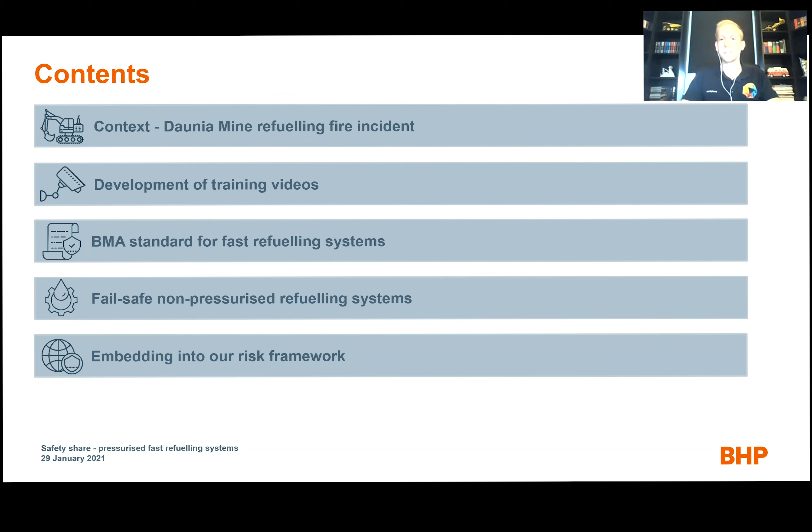As an event overview, before we look into some much better representations of it, on the 4th of April 2020 there were standard refueling operations on an excavator, a Cat 336, but the fuel cap on the top of the tank had blown open under pressure, which covered the excavator operator in diesel fuel, also impacted the exhaust system, and that resulted in the ignition of a fire. This was controlled using fire suppression and a couple of fire extinguishers at the time, but it's not a very pretty sight to have when that incident happens. You can see a little photo there of the immediate aftermath.

Through the investigation, after a few sessions to tease out the learnings, we came to these conclusions: that certain early shut-off and overfill events are quite common, not only to BMA, BHP, but from what we believe to be the wider industry as well. There's just a lack of engineering standards, which led to variations in systems and OEM components, and that can happen naturally over time when fitting what is seen to be like-for-like components.

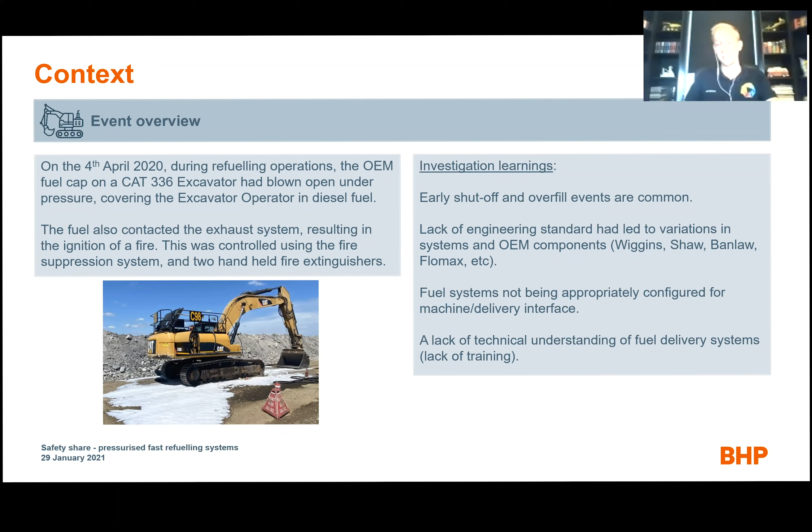Fuel systems may not be appropriately configured for the machine or delivery interface. You may have different delivery systems versus the receiving equipment, and that was something that had to be standardized as well. Generally, there was a lack of technical understanding of fuel delivery systems by way of training, particularly for service persons or operators. So can we go into the next slide?

It was pretty clear when we were performing this investigation that, even though we had subject matter experts in the room who dealt with hydraulics, it was very difficult to adequately convey that information through pictures, slides, or technical documentation. We found it hard to really show what the dynamic interactions of the refueling system were.

So what we'd done is contract an animation company, which we'd found out, I believe, the New South Wales Resources Council had used as well in recent videos, and it's an excellent way to convey information. So we'd done the same for our situation.

We've done a part 1, which is the initial incident and lessons learned, and a part 2 overview, which is more involved with training individual users of the systems with technical specifics. Those videos have been provided to Resources Safety and Health Queensland for distribution, but what we're going to do is switch over to part 1 to show the video, which will convey the incident in much greater detail than what I've done so far.

So let's roll it. Okay, and let's hope it works, mate.

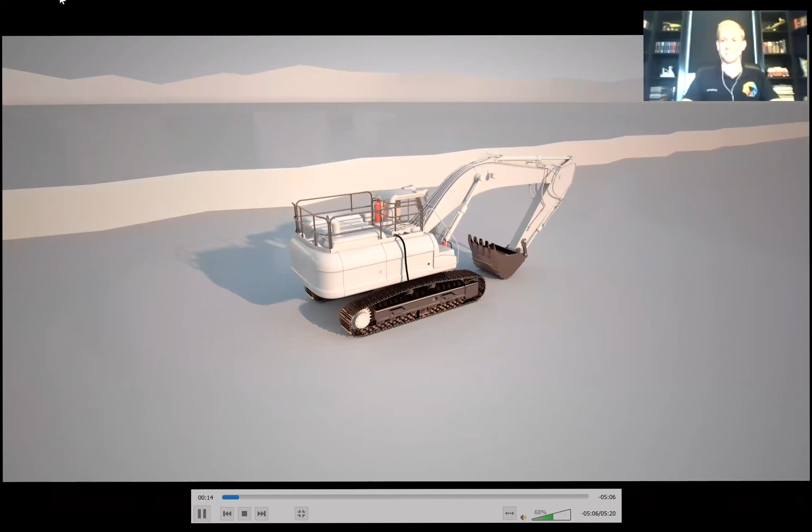Over the past decade, there have been a number of incidents at mining operations involving refueling activities on large mobile equipment, including several reported across Queensland in recent years. Incorrect refueling practices can result in environmental damage from fuel spills or fire events when fuel contacts hot surfaces. An incident occurred in a Queensland open-pit mine on the 4th of April 2020 involving an excavator and a service truck delivering fuel. The incident occurred as follows.

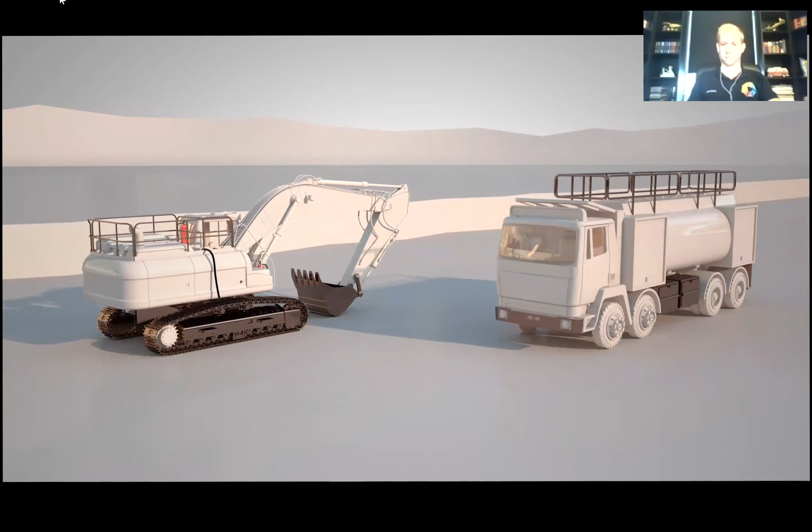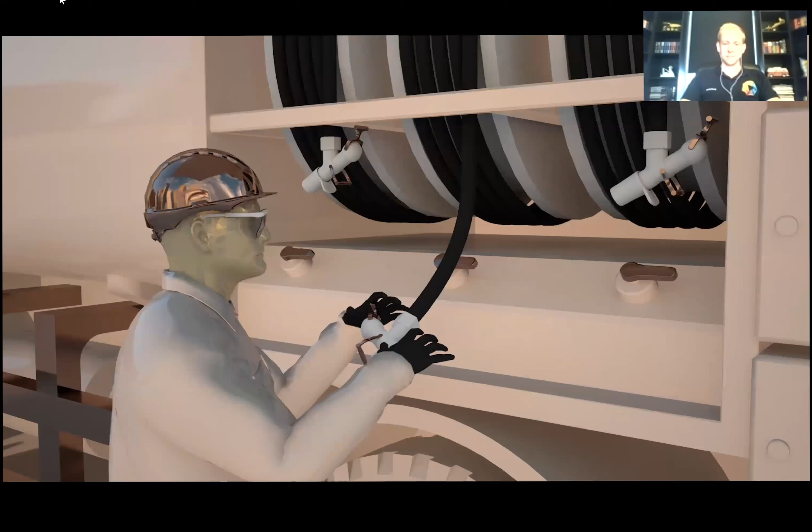An operator had requested refueling for their excavator at approximately 9 a.m. A service truck arrived near the excavator and parked a safe distance away. The operator, sighting the parked service truck, shut down and exited the excavator. Both the operator and service person attached their isolation locks to the excavator. The service person retrieved the fuel nozzle from the service truck and connected it to the excavator tank receiver.

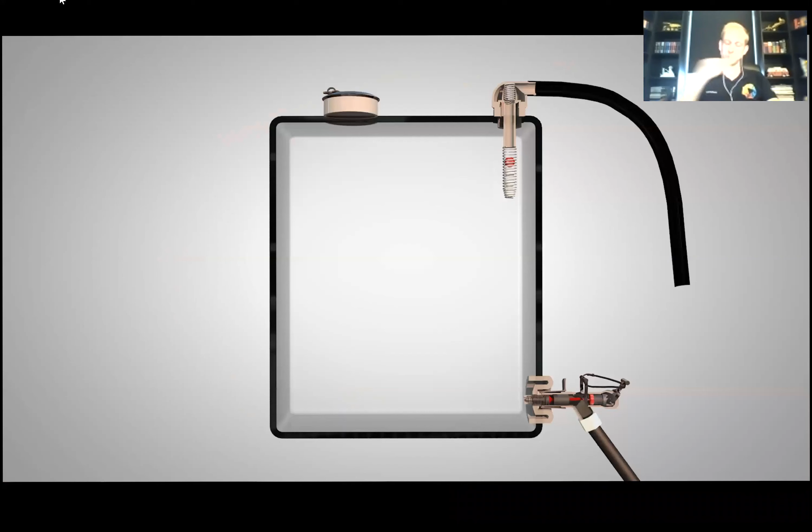The service person then went back to the service truck and started the fuel pump, then rotated the fuel nozzle handle into the on position. Through the incident investigation, it was uncovered that it's common practice for personnel to manually retain the nozzle in the on position, either by hand or by using implements to lock the handle in place. The service person was then positioned away from the fuel nozzle while the tank filled with diesel.

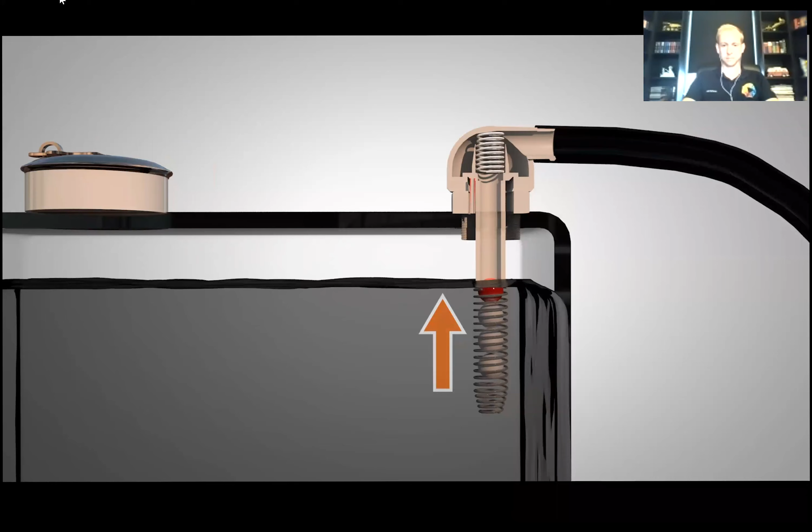As the fuel level rose, it reached the float valve, which obstructed the air venting from the tank. With the tank vent closed, the pressure within the tank rose sharply. Normally, in pressurized refueling systems, pressure buildup would automatically shut off the fuel nozzle by pushing the rotating T-handle back into the off position. Not, however, while the manual override held the handle in place.

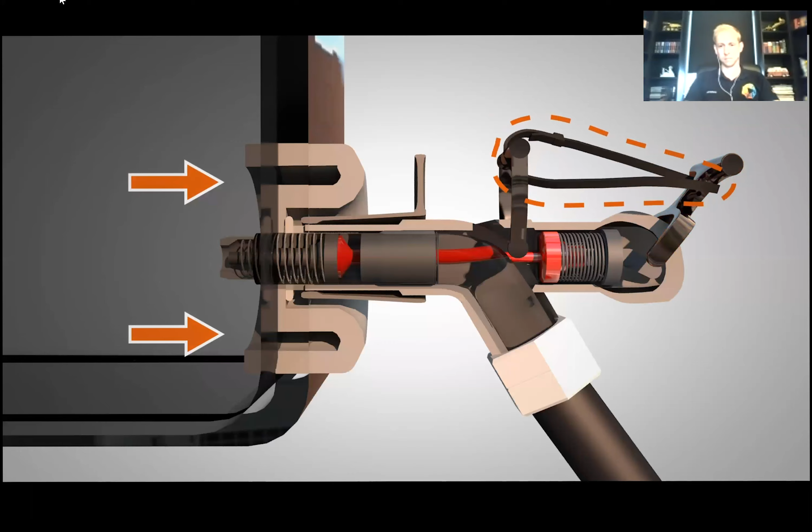The fuel continued to pump into the tank, further building pressure. The only means for air to escape was the 1.6mm bleed hole and the pressure relief valve in the tank vent. Note that this pressure relief valve cracks at approximately 16 psi and should not come into play during normal refueling operations.

With the air displaced from the tank, the fuel attempted to escape from the same tank vent. However, the fuel cannot be displaced at the same rate, as it is only designed for air, not fuel. The pressure within the tank increased further.

The retaining tang underneath the fuel cap deformed due to the pressure, which subsequently caused a bulge in the fuel cap. The O-ring in the fuel cap then burst, causing fuel to spill out on top of the tank, in addition to fuel spilling out of the overflow hose.

As the fuel spilled out of the fuel cap at the top of the tank and the overflow hose, the operator and engine bay were covered with diesel. Due to the heat within the engine bay, the diesel ignited.

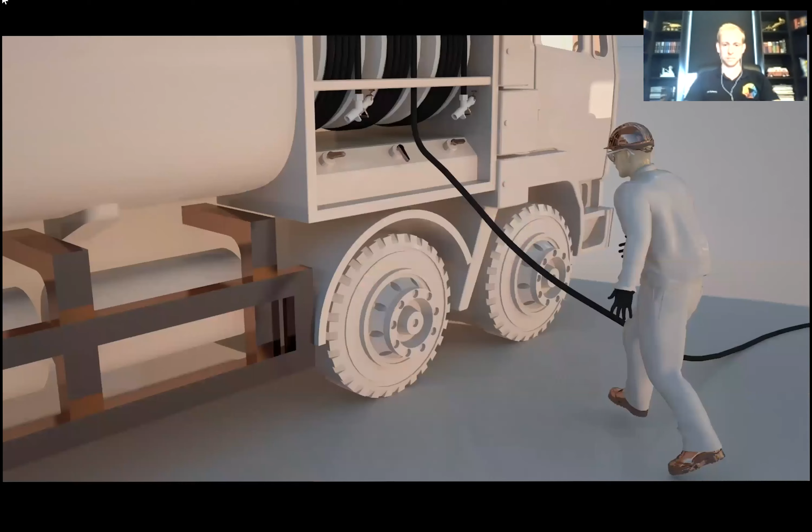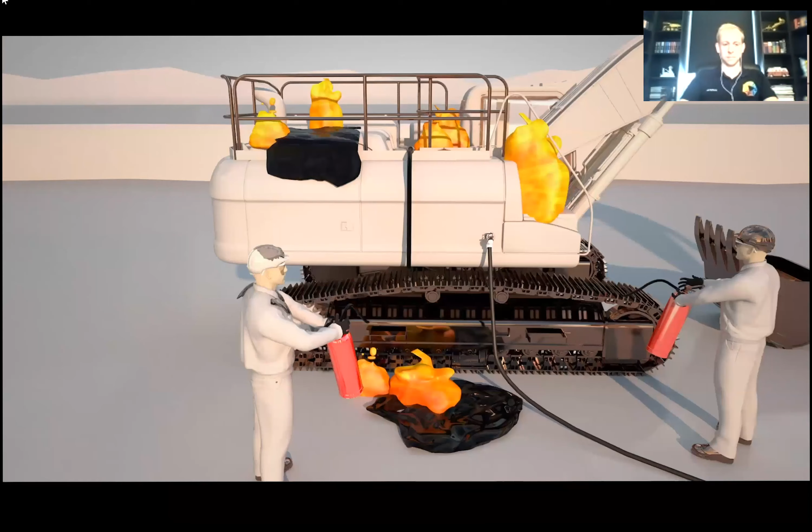The service person noticed both the fire and fuel spillage and ran back to shut it off. The operator then ran to the excavator cabin to activate the fire suppression system. Then both the excavator operator and service person retrieved fire extinguishers to put out the small fires on and surrounding the excavator. The emergency protocol was activated and personnel were notified of the incident.

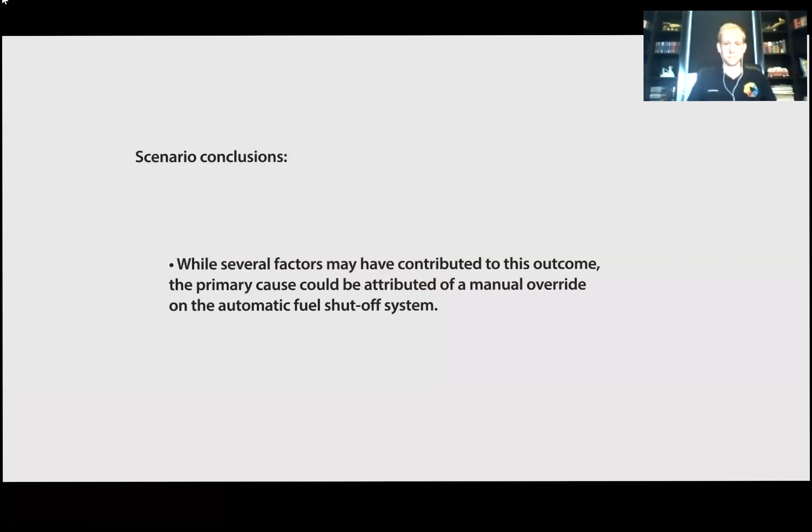While several factors may have contributed to this outcome, the primary cause could be attributed to the presence of a manual override on the automatic fuel shutoff system. This is believed to stem from a lack of technical knowledge of the safety controls present in pressurized refueling systems.

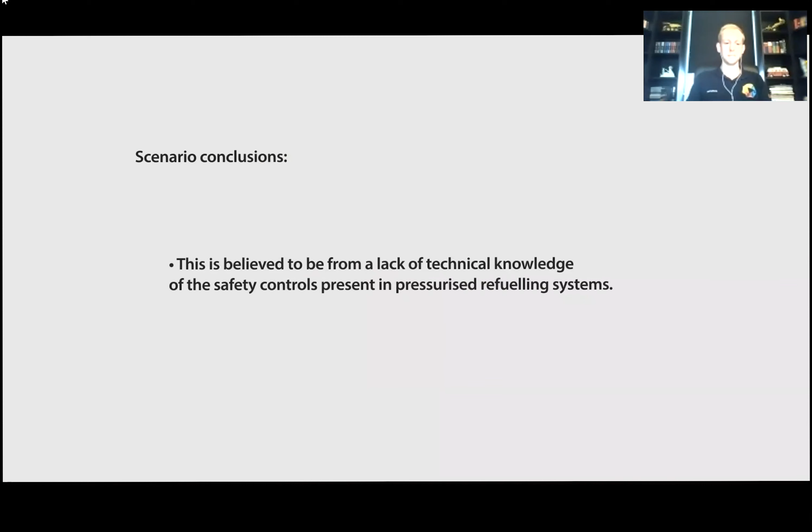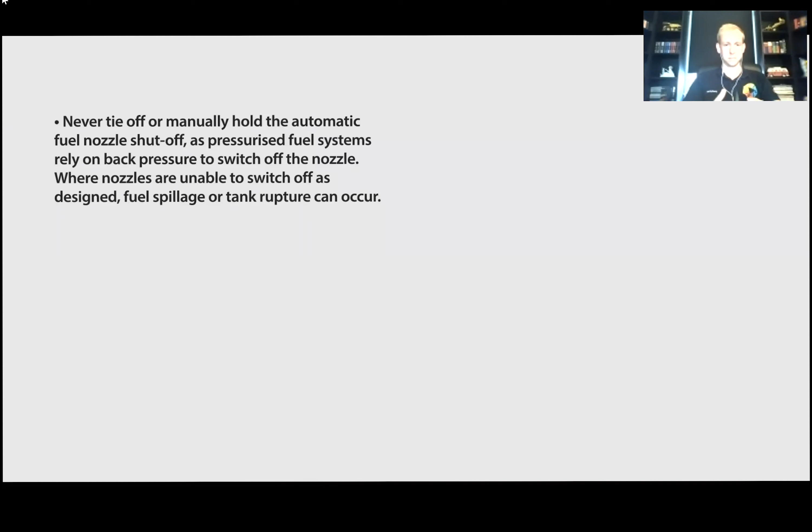After investigating the primary incident and other possible refueling scenarios, the following key lessons were discovered. Never tie off or manually hold the automatic fuel nozzle shutoff, as pressurized fuel systems rely on back pressure to switch off the nozzle. Where nozzles are unable to switch off as designed, fuel spillage or tank rupture can occur.

Always ensure that the fuel delivery components and the fuel receiving components match, including component manufacturers and settings. Unique mobile plant requirements must also be considered, such as fuel tank size and location of the receiver.

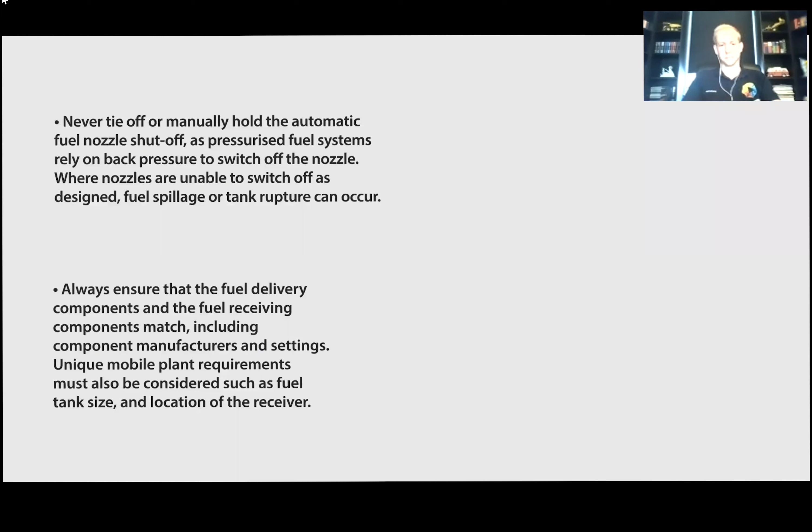Always ensure that any personnel undertaking fast fill refueling activities are aware of the technical specifics of all fuel delivery components, that they understand the hazards and the function of critical safety controls.

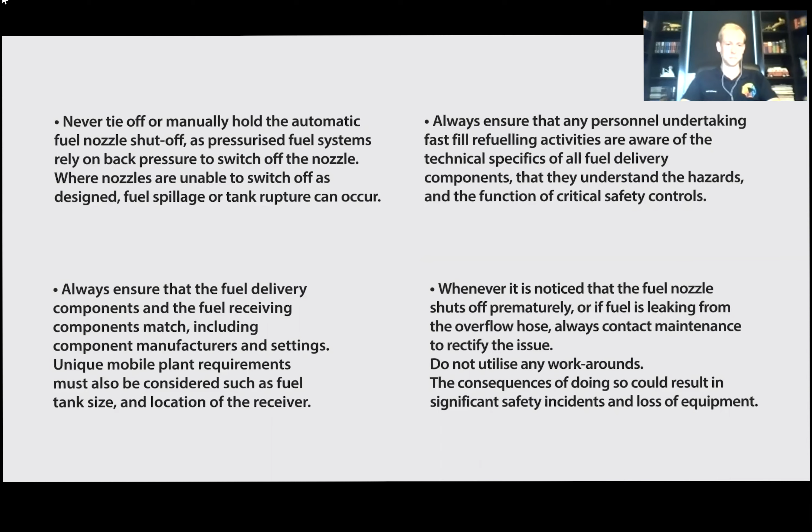Whenever it is noticed that the fuel nozzle shuts off prematurely or if fuel is leaking from the overflow hose, always contact maintenance to rectify the issue. Do not utilize any workarounds. The consequences of doing so could result in significant safety incidents and loss of equipment.

Cool. Thank you very much for that, Christian.

One of the immediate things I take away from rewatching that video is that it could have been a hell of a lot worse, with the fact that the fuel on the engine bay had ignited, but the operator was also covered with diesel, and there could have been potential for that incident to be a lot worse. So given that, and knowing that there's quite a fair bit of incidents like this in the past, just involving fires from refueling activities, it was one of the major triggers to create a much larger investigation into this.

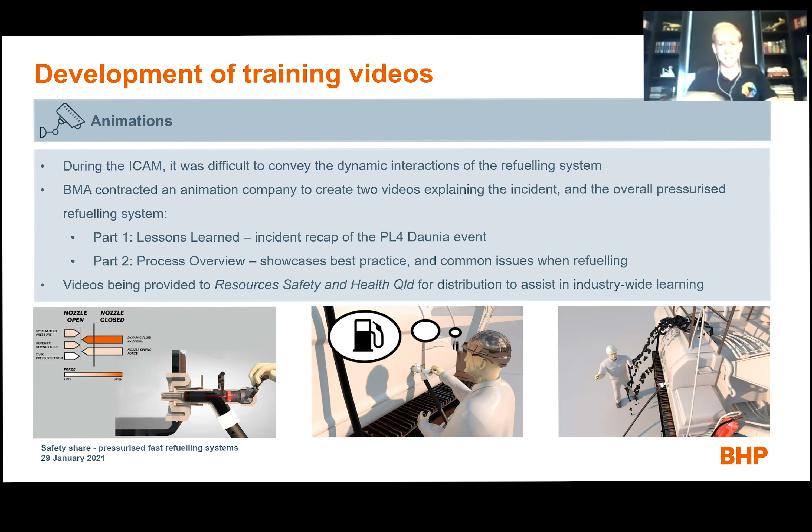So while the video focuses heavily on the operator behaviour in terms of using a manual override or evidence of a manual override, or not knowing how the systems work, there's a better way to be able to control this: to eliminate the use of pressurized systems to begin with.

There are other options for refueling where you can use a fail-safe, non-pressurized fuel system, which I'll go into a bit of detail in the next slide.

But in order to enforce that, we needed to have an aligned standard to ensure that we're rolling out a step change from pressurized refueling systems to non-pressurized refueling systems in a formal way using this standard. And that standard scope includes making sure that the receiving equipment, all of the heavy earth-moving machinery, has standardized requirements to have those non-pressurized components.

The fuel delivery component side of things, in terms of the service trucks and the fixed fuel bays, need to have the same standardized approach for non-pressurized systems and the same litres per minute flow rate, as well as systems inspections and testing. Those installations of these new systems are in progress across our fleets, retroactively applied across a lot of our older fleets, and we're following our risk assessment and management of change processes for that one as well. Next slide, please.

So to go over this briefly, the big difference between pressurized refueling systems and non-pressurized fail-safe refueling systems is that the pressurized systems are pretty old school, and they do depend on the back pressure of the fuel level in the tank, along with other metrics such as the spring settings in both the nozzle and the receiver.

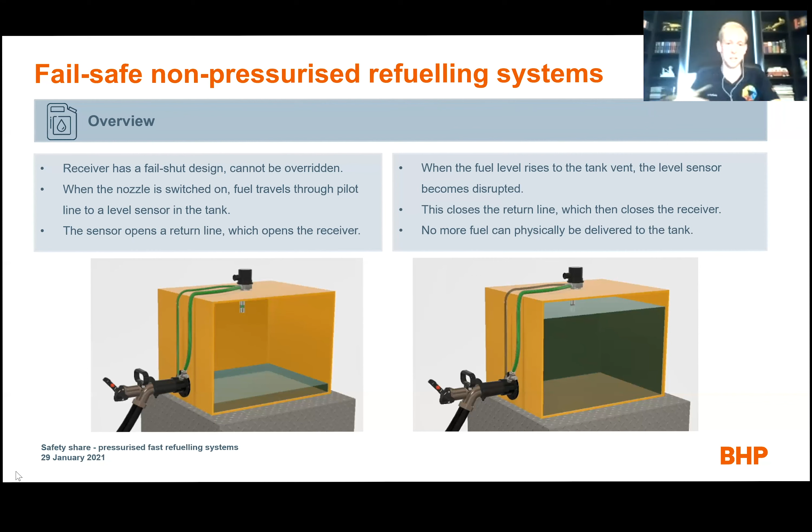So those are two key questions we decided to ask ourselves. Next slide.

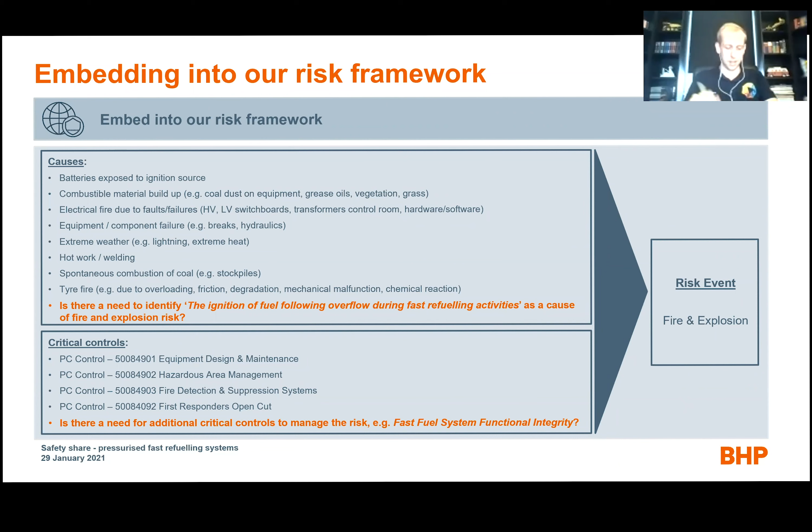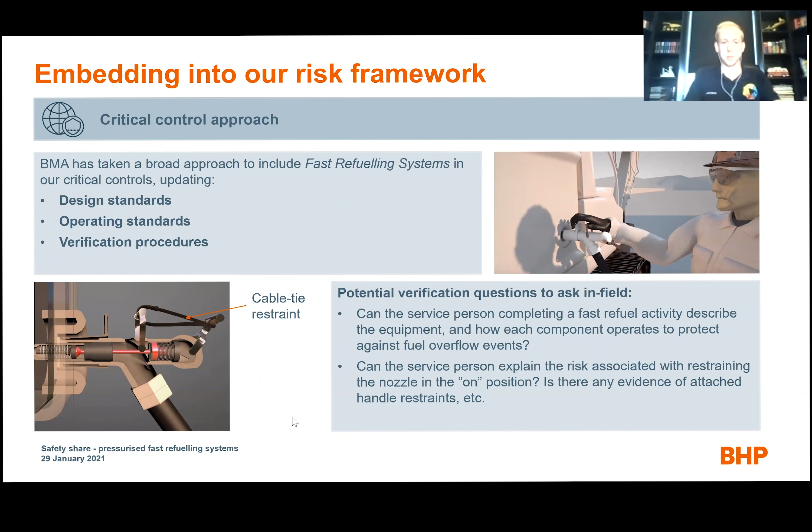And certainly, can they explain the risk associated with restraining the nozzle in the on position, particularly for pressurized refueling systems? Is there any evidence of attached handle restraints as well? So that's where we'd come to for the critical controls piece.

Next slide. And I think that is it, so I might hand back over to Christian. Again, thanks for letting me run through the presentation. I think it's very valuable to go through the video to show exactly what happened and show these learnings across the industry.

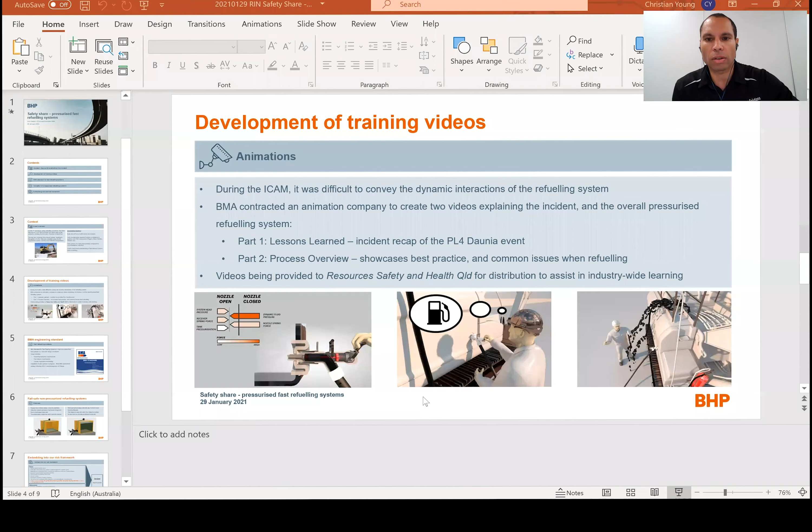I guess while that's happening, Eric, I've got a question or maybe an observation. If I think about a lot of the risk assessments I've done as a safety professional, there's always an assumption equipment is fit for purpose. What you're showing and unpacking here is, at a real technical level, how potentially we mightn't even know these assumptions are incorrect. I don't know if there was something that fell out in that space as a learning.

Well, the assumption that equipment is fit for purpose is good for a fixed slice of time, but the problem is that when systems develop and update over time, with older equipment, it's not necessarily triggered that it needs to be updated to the new systems. And certainly with this development of non-pressurized systems, and certainly fail-safe non-pressurized systems.

One other thing that did drop out is that there are available non-pressurized refueling systems on the market. However, when they fail, when the components that deem it non-pressurized fail, they will revert back to a pressurized system instead of closing off the ability to put fuel into it. We thought that was certainly not the way we wanted to go. We wanted to take that step up from non-pressurized to fail-safe non-pressurized, and take that leap. So it's all about making sure the older equipment falls in line with newer technologies that are safer.

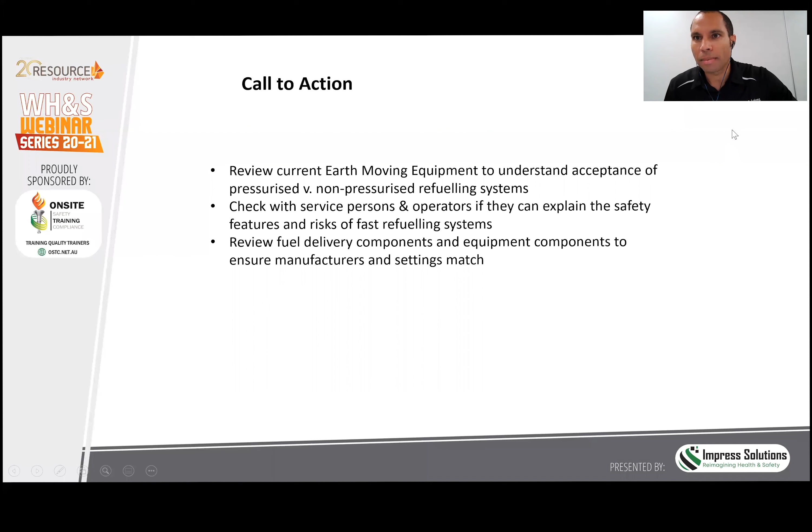Yeah, so it's essentially a lot of the learnings that came out of the video and the presentation, but through this it'd be a good idea to understand the prevalence of pressurized versus non-pressurized systems at our companies and operations, to check in with service persons if they know the safety features of fast refueling systems, and to review the delivery components to make sure they match - because you'll get issues of it shutting off prematurely or not in time, which could result in overpressurization. Getting the component settings to match is very important for pressurized refueling systems, which again can be overridden if we go to a non-pressurized system.

Perfect. And there were a few more there, mate, or have you covered those three off? Those three are all good. Yep, done.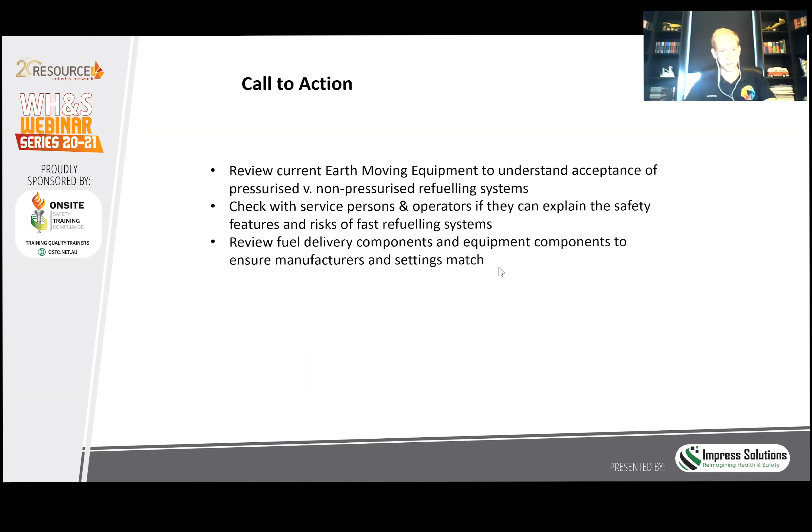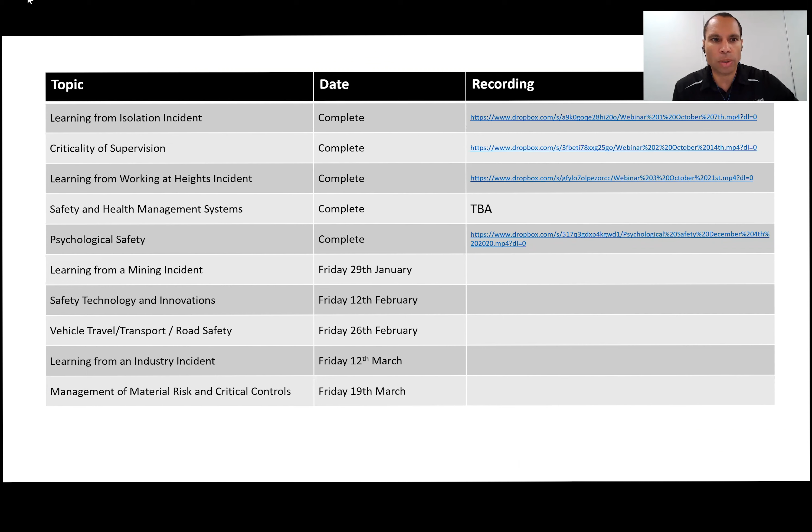Quick question: quick fill versus traditional fill - has an assessment been done on safety and time saving? I'll have to take that one back to the team actually, and spend a bit more time rather than rushing an answer. Yep, I'll look into that one. Not a problem.

Okay, so look, Eric, appreciate your time and the work you've done in taking the time to share this. For me, certainly as a non-technical person, it's quite clear - I can understand what happened and what can be done moving forward to learn from that. So everyone's got the calls to action.